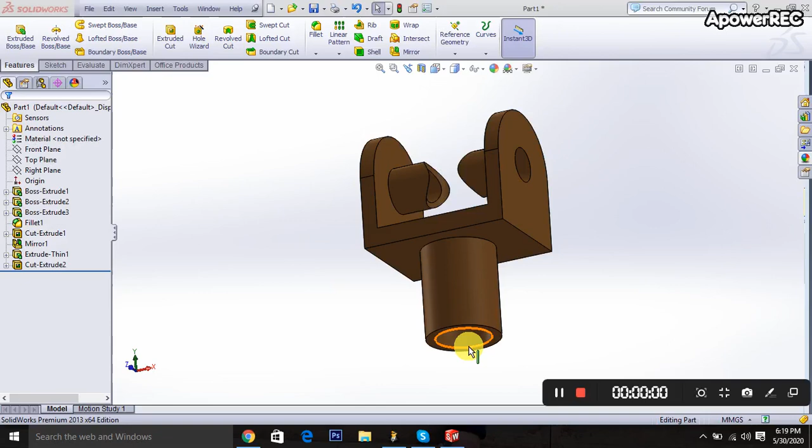Today I'll show how to make this object. So at first I'm taking the new file,

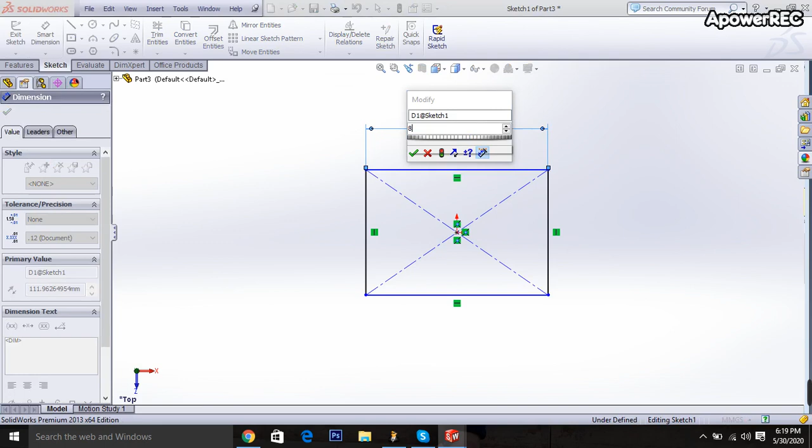then the sketch is taken. Go to the top plane, extrude boss is selected, center rectangle is taken, then determine the dimension 80 millimeters, 60 millimeters, exit it, 10 millimeters upward, blind is selected.

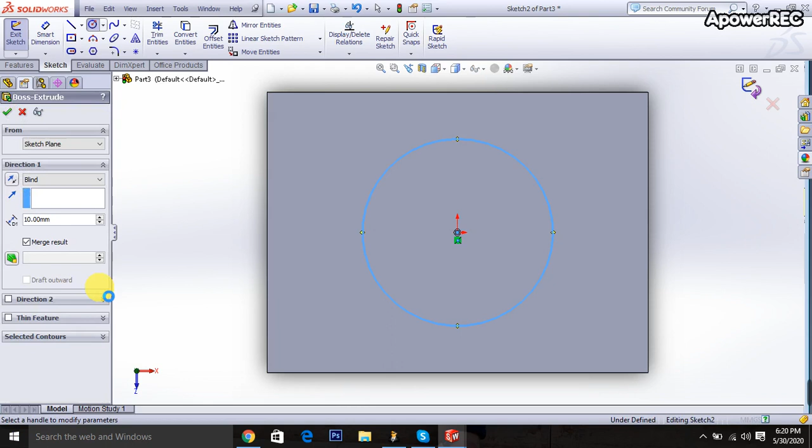Go to the extrude boss again, click here, then go to the circle, Ctrl 8 for normal plane, then it will be 40, okay, then it will be 60 millimeters and direction will be downwards.

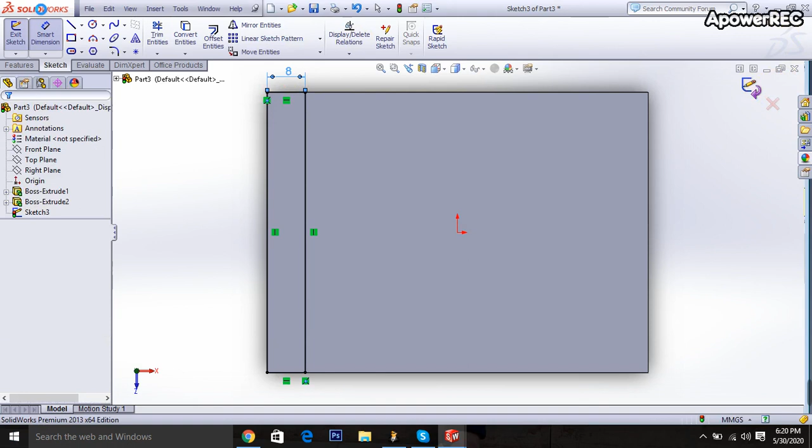Then again select the extrude boss and click here, then Ctrl 8 for normal plane and go to here, corner rectangle is taken and sketch, then determine the dimension, it will be 8 millimeters, then exit it and it will be 60 millimeters also.

Okay, done. Then fillet is taken, one surface, one plane, one surface, another surface, another click.

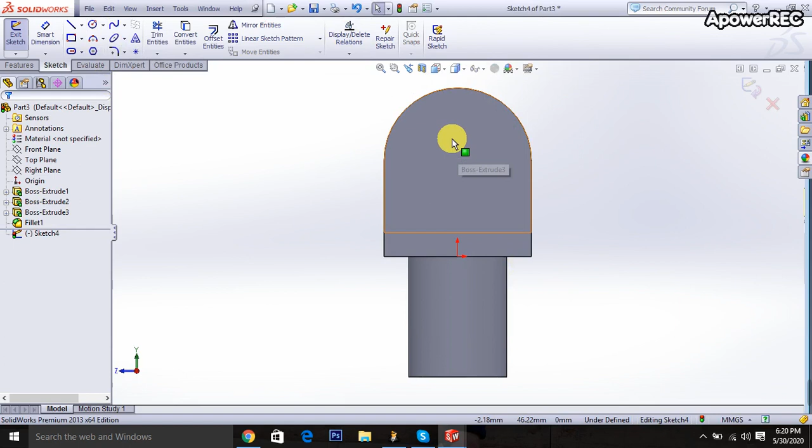Okay, done. Then extrude cut is selected, then click here, then Ctrl 8, then go to here and select and draw a circle. Go to the circle and draw a circle, it will be 25 millimeters.

Okay, then through all is selected, go to the mirror and right plane is taken, click here, another click, and geometry pattern is taken.

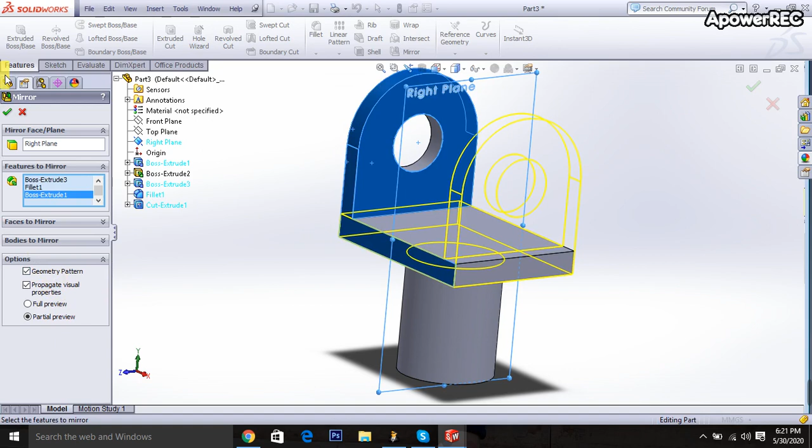Okay, then extrude boss is taken and click here, then Ctrl 8, then go to the circle and draw a circle, it will be 25 millimeters. Okay, done. Exit it,

Then it will be 80 millimeters and it will be direction this way. Okay, thickness will be 2 millimeters and this direction will be this way.

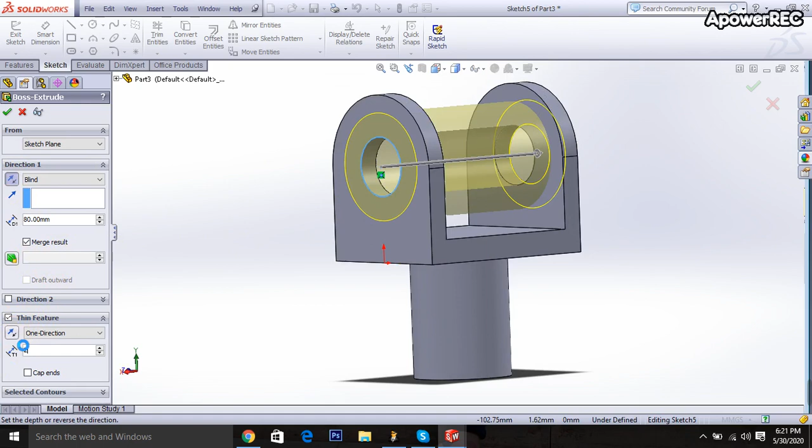Okay, done. Then extrude cut is selected, click here, then Ctrl 8, then go to the circle and draw a circle, it will be 30 millimeters and go here and through all is selected. Okay, done.

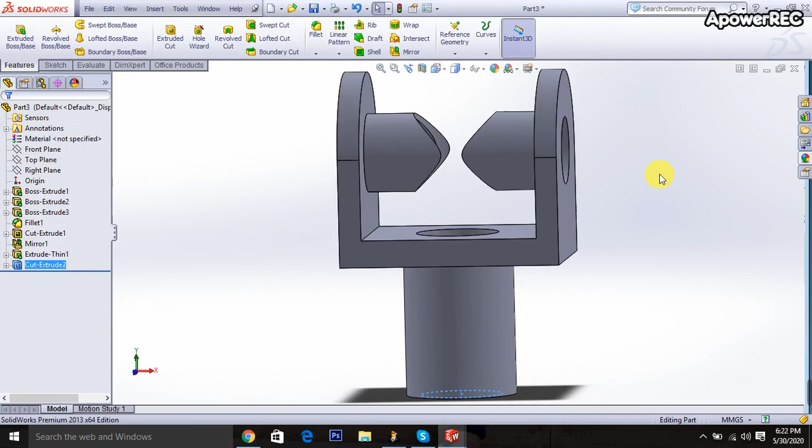Okay, go to here and select the color, steel or chromium. Okay, this color is taken.